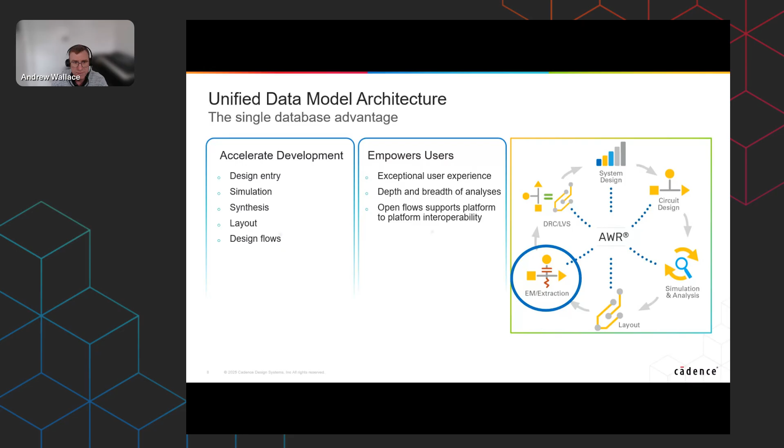We're going to be focusing quite a bit today on the EM extraction side of this flow to show you how we can take that layout automatically into the electromagnetic tool.

Now, I mentioned the AWR design platform. This includes AXIEM, that's a planar electromagnetic tool, Analyst, a 3D FEM, finite element method solver, and also the Visual Systems Simulator. That's a sample time domain systems block diagram tool that sits all inside the same platform.

Since the acquisition by Cadence, we have integrated their 3D EM tool. That's a product called Clarity, and their thermal tool, a 3D FEM solver once again called Celsius. And they excel at FEM simulation because they're able to distribute the mesh generation of the problem as well as the solving. So they will address very large board structures, very large electrical or mechanical structures in the EM or thermal worlds.

The beauty of these tools sitting side by side is that we can design from the system budget analysis, perhaps designing a communications link. We can drop into the circuit level design in the center of the screen here, and we can design the physical board with the actual vendor library component parts and the layout.

We can drop back into the system world to look at test benches and excite with real modulation signals, for example, radar or 5G. And then finally, we can drop into the EM world, that's the focus of this webinar today, to look at analysis perhaps of cross-coupling that was unexpected, maybe of antennas and radiation patterns in the 3D or the planar 2D EM world.

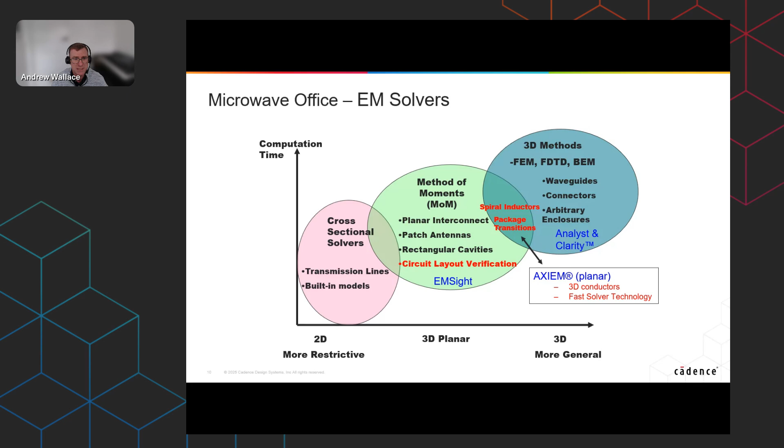Today's topics will talk about EM extraction from the circuit design, which can go into planar electromagnetic tools like EMsight and AXIEM. It can also go into 3D EM tools like Analyst and Clarity if it's a 3D issue, or even into thermal tools. Cadence has a tool called Celsius, a thermal 3D FEM solver, and we can export the layout generated by the schematic diagram into the thermal engine. I have a slide on that later on.

Specifically for AXIEM, the 3D planar tool, this is method of moments. It's open boundary, so we solve without metal walls around the element. That's great for antennas and antenna radiation patterns. On the top left corner of this picture, you can see a beamforming antenna radiation pattern generated from the software, and in the center, a fancy Sierpinski type antenna. All possible because they're planar and flat in nature.

PCBs by definition are planar and flat in nature, so that's the best solver to use for that approach. It is an off-grid solver, so we mesh the problems sent to the EM tool, and it's fully integrated into the circuit level simulator Microwave Office. We can do optimization, annotate and view the fields and currents, and do parametric sweeps and studies.

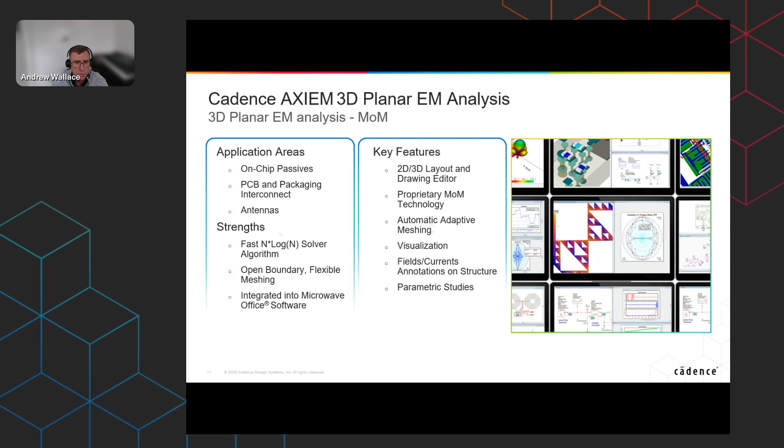If the issue is a 3D problem, I've mentioned Analyst and Clarity. They're both accessible from exactly the same flow. These really look at on and off chip passives, any 3D structures like a connector to board transition, perhaps a waveguide structure, bond wires inside the package, as you'll see in a moment on the next slide. Again, this is integrated into the Microwave Office tool.

We even have parameterized 3D elements that you can use and drop into the schematic design, along with some vendor encrypted components like connectors inside Clarity that come with a complete and accurate design as a 3D file that we use from the vendor manufacturers. Again, parametric studies, post-processing, and the ability to run over compute farms mean that's a very fast 3D electromagnetic tool.

Finally, the same extract flow I'm about to show you would work into the thermal world as well. We can take the design from the schematics entry - that design is 2D and 3D because of the single database - and copy that across into a thermal tool. I'll show you a similar design working inside the software in one of my examples. In this case, we have 3D bond wires and gallium arsenide transistor chips here, and you can see that they all heat with the RF power.

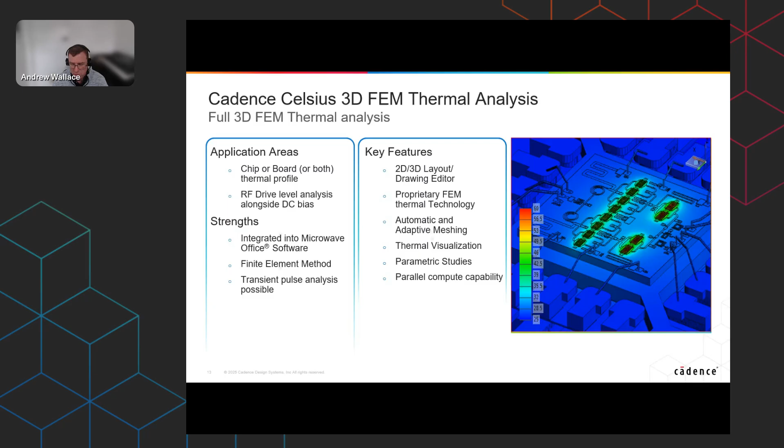The flow into the thermal tool is identical to that from the planar and 3D electromagnetic software. So let's look then inside the software at the actual extraction flow I've mentioned and how it works.

In the presentation that we'll share with you, I'll leave these slides behind, but I'm an ex-engineer and I love to demonstrate the software. So what I'm going to do is hopefully open up the design. You should be able to see the screen just now, and I'll check with my colleagues on the chat with me that the screen has changed.

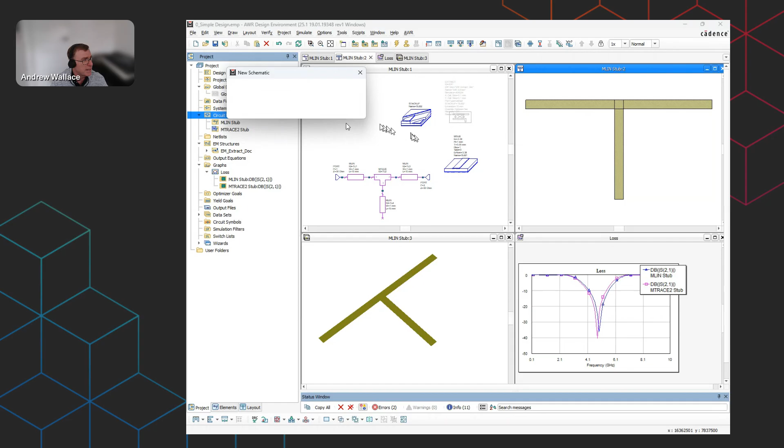Here we have Microwave Office, a circuit level simulator that we have just here, and it's very easy to drive. If I right click here on a new schematic diagram, we can generate a new schematic diagram, and from the elements tree we start to populate that with microstrip strip-line models. As we do so, these models aren't just electrical devices.

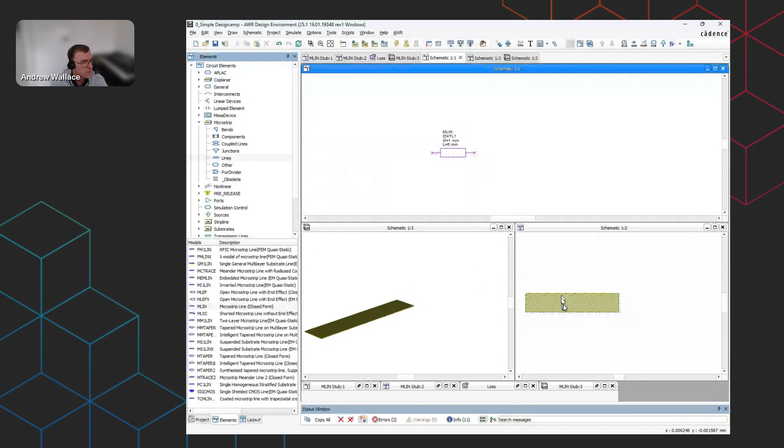Let's lose these for a moment in the background, but they have 2D and 3D layout associated with them. So the moment I look at the 2D and 3D image of this single object, you can see that it sits there at the correct size. If we change the schematic data, we update the layout. And if we come into the layout and double click and update the length and width of the line, you see immediately that the electrical schematic values are updating.

It's not synchronization. There's no layout versus schematic checking needed here. It is one C++ object that has views electrically in the 2D view and in the 3D view. So it's very, very easy to drag and drop those down.

If I do that and start to build up a stub circuit, just as you saw a moment ago, I'm dragging in a microstrip tee, an output transmission line, and a stub. You'll see just here that we have then effectively a 2D and 3D layout for this design.

That is giving us the ability to consider the layout as part of the electrical simulation. And when we generate a graph just here, let's turn off this one for a moment. We simulate and run that simulation and look at the results from the electrical world. Now we have a wonderful tool inside Microwave Office where you can add any of the parameter values to a tuning scroll bar.

You pick up the screwdriver, you pick up the width and the length of this item, and you'll see that those parameters are added. As I move the length and reduce that down, you should see the simulation results update.

If I were to grab the actual item, you'll see that when we let go of the slide bar, the schematic values update too. So that's real-time simulation running, as you can see on the video just there, giving us the answers. I'm just going to restore that to 10 millimeters as that's the basis now of our next approach.

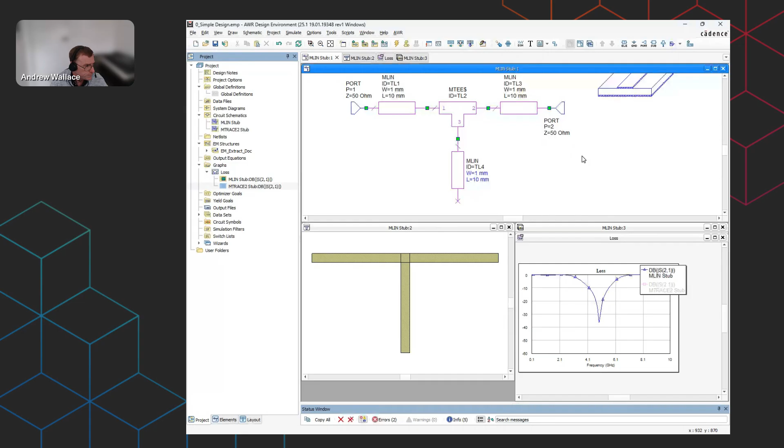Taking this design, what we need to do is send it out to the electromagnetic tool. And it's very simple to do so. We have the substrate definition here for the microstrip lines, but I'm going to drop into the scripts menu and use a script to generate the stack up that goes with this.

When we do so, you can see that we end up with a stack up that copies the microstrip substrate, but adds perhaps air and a board material above for the electromagnetic world, and also this extract block. That extract block allows us to go round the electrical items, select those electrical items, right click into their properties.

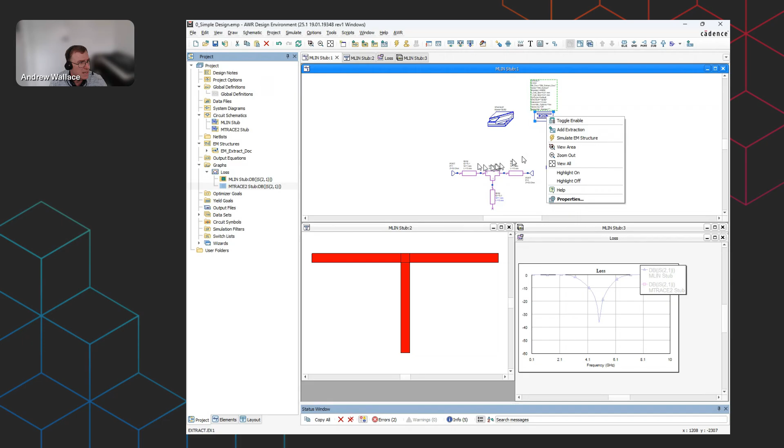If we enable that extraction tick box, then we end up immediately with the items being sent to the electromagnetic engine. So I've done that just here, and when we hit simulate, off goes the software. It copies the schematic diagram into the EM world.

It goes away and runs the electromagnetic simulation, and comes back with the results from a planar method of moments, from exactly that same design. That's something that will give us some answers, plotting the trace on the graph right over the top of what we had previously.

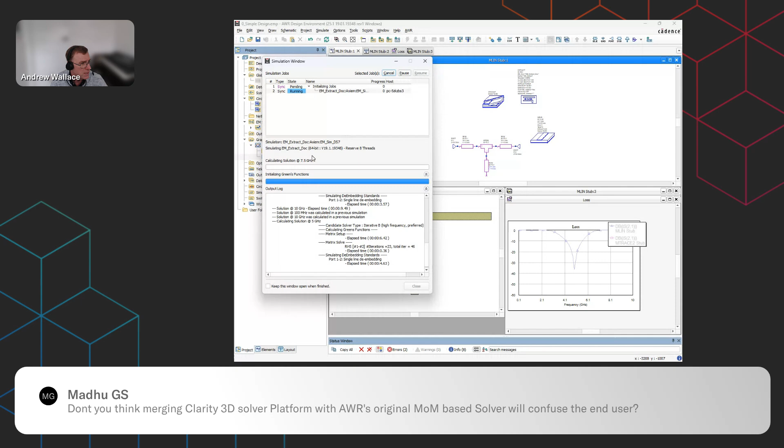Now, although this computer is actually a 10-core machine with dual threads, it could run 20 cores or virtual cores. I'm running just on 8 threads. We're doing adaptive frequency sweep. Just here, you can see that we've got various frequency points running, and that will give us some answers across the frequency band and plot our new trace.

So the actual method to take this schematic design across to the electromagnetic world is very straightforward. We are drawing the schematic diagram. We use a script to generate the stack up and the extract block, and then we take the elements and link them via the extract block into the EM world.

When we hit simulate, the software will go away and simulate that now in a method of moments tool, having meshed the design. Going to cancel that for a moment. I've got many more frequency points than I need. I don't need the answers to that just now.

So with the block off, we end up with the electrical simulation. And just in here now, I've got another design. That second design looks identical, but it has got the stack up and extract block enabled.

And when we turn on the trace from this simulation, you can see that when we run through the EM tool, we actually end up with, in this case, the right frequency points, a slightly different response. Now that's because we're looking at the radiation from the end of the stub.

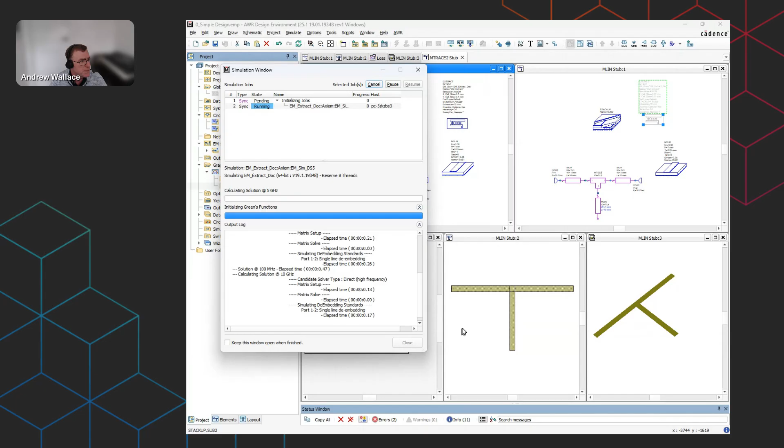And in terms of the stack up of material, we might be looking at the layer of air and perhaps a lid above the box. So you can see immediately if we were to lower the lid down and make that much closer to our track, re-hit simulate, then our transmission line resonant frequency is likely to change because of the position of that lid.

And you'll see that our pink trace now has jumped from the left of the original to the right. That's an effect of the lid. Let's go back and make that much further away once again.

Now, when we start to shrink designs, we've got some clever items we can use. Instead of a standard transmission line, what I've got here is an M-trace element. That M-trace element in the layout allows me to route the item back round on itself, keeping the length fixed to 10 millimeters, but bending it back on itself.

It should still be the same transmission line performance, but of course now there is coupling in these traces that the electrical design does not take into account.

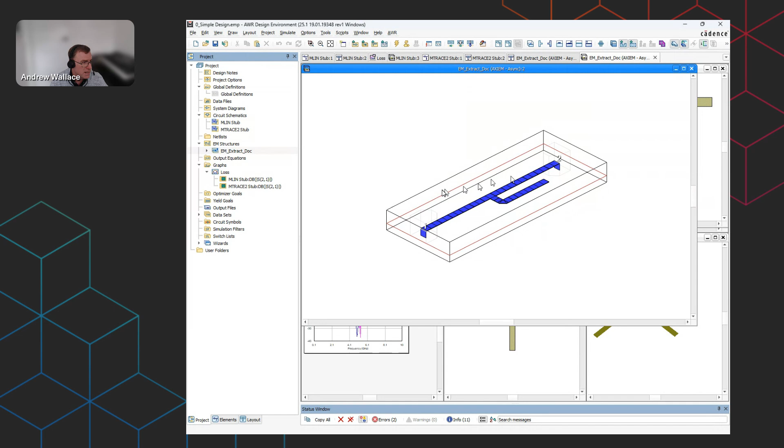When we hit simulate, the method is that we copy that schematic into the electromagnetic world. You see it's just updated the copy. We put it onto the board material in 3D space, mesh it, and that mesh was generated in the background and solved with the 3D planar method of moments tool. The S-parameter files are brought back, and we end up with the results in the schematic simulation traces.

So this idea of bending the transmission line, folding it back on itself, gives us quite different results in terms of frequency points. If I mark them, our original was at 5 or 4.9 gigahertz. The fact that we're folding it back is now 400 megahertz higher, about 10% difference, purely because of that coupling from the trace line.

So it's important to use this flow. To repeat once again, I'm taking the electrical schematic design that generates the layout automatically. With the extract block, the extraction copies the design into the EM world and does an EM simulation. Just to prove it's copying dynamically, let's double click and change this line just here.

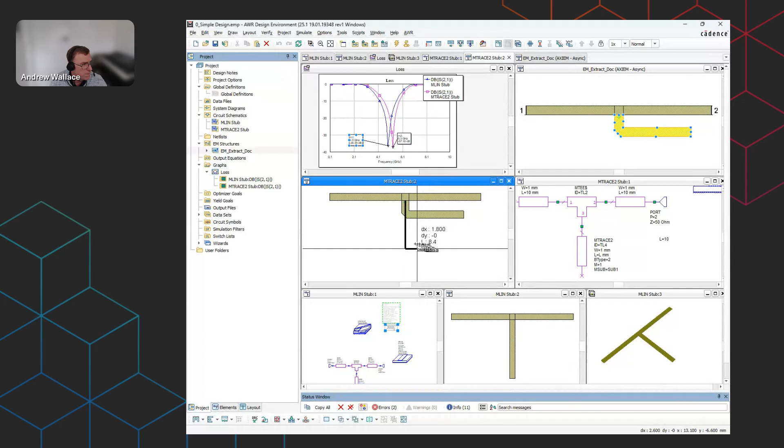That folding back, when we hit simulate, is copied into the electromagnetic tool. The mesh is generated, and I expect this will change in frequency once again from 5.3 gigahertz, changed in depth of notch there because of the way the coupling is taking place. So this extraction flow is a very straightforward method to use.

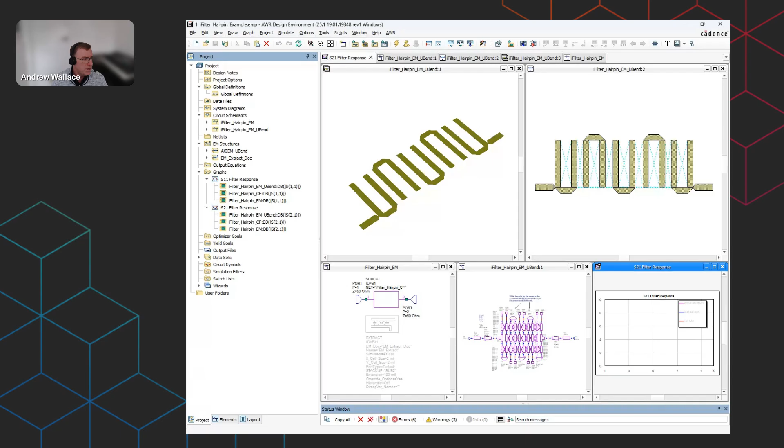And if we drop into the software just now, let's find that one. Two moments, this one here. You can see that schematic diagram is what's responsible for generating the layout.

If I come in here and turn off the schematic elements, it is the schematic diagram that is generating the electrical layout, in 2 and 3D views. And when we simulate in the linear simulator, we have quite a fast simulation result.

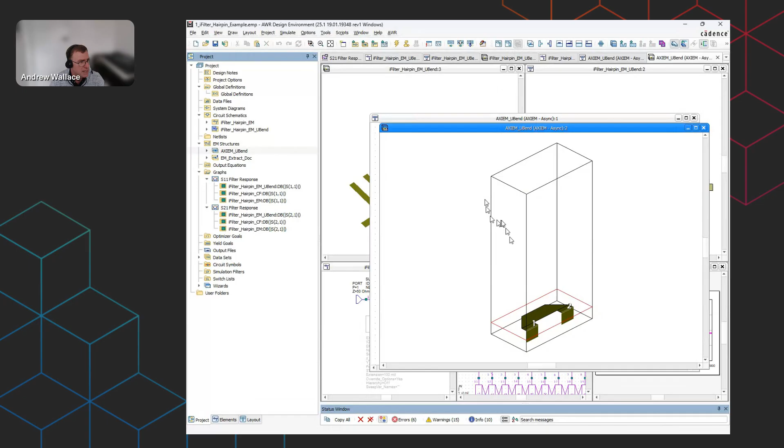Now, in this case, we've actually done one other step in between. This is a bend in the structure, this section here. We don't have a very good electrical model for that, so we have an EM design for that bend that has been meshed and simulated in the EM tool in its own right. So that is a standalone bend that we've included.

Now that bend means there is signal coupled back against itself. You can see in the graph quite a difference between the original schematic diagram, the electrical models, versus the design that has the electromagnetic results for the bend. This is quite a big shift in corner frequency, going from 5.5 gigahertz all the way up to 5.6 gigahertz, so 100 megahertz difference perhaps in that corner frequency.

Now that's quite a quick and dirty way of looking at the design just with the bend. What I want to do is extract the whole filter. So in this case, our extract block is pointing to the AXIEM tool. I've mentioned earlier we could get to 3D EM or EM thermal approaches, so in this case we're going out to AXIEM.

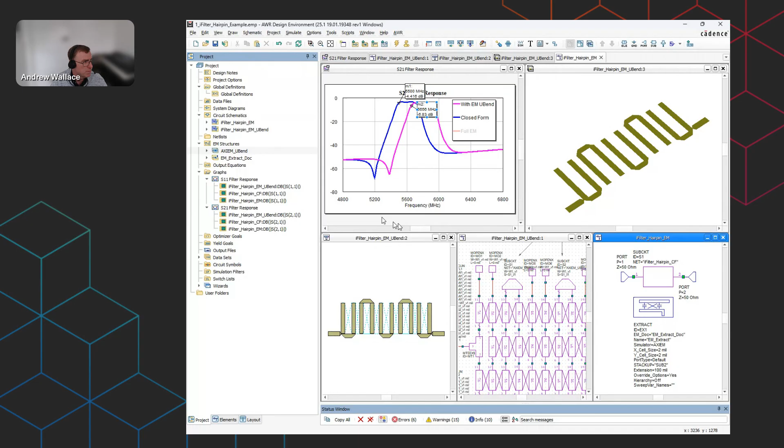What it will do is copy that design into the electromagnetic world, like we have here. It will take that into the substrate definition, mesh that, and solve it in the electromagnetic world.

Once again, let's hit go and look at the results. So once again, even with a small difference from the EM bend versus the electrical bend, we now have a complete filter that's solved and simulated in the electromagnetic world, with a response that I would trust.

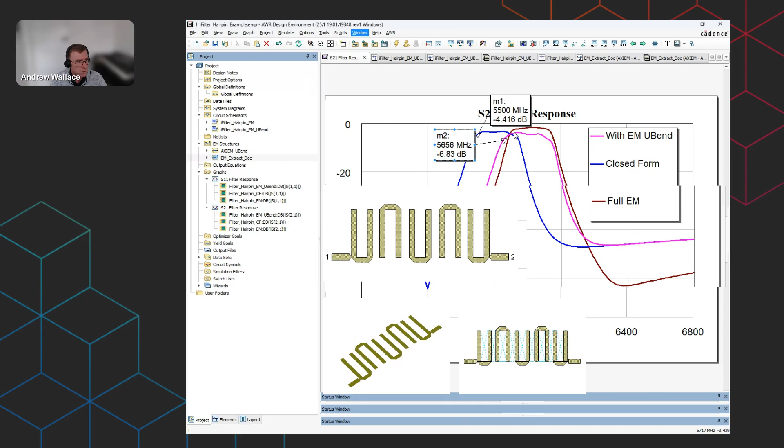And that's because we're folding things in nice and tight, and because coupling is going on between the circuit elements that perhaps we're not simulating. So it's critical to use this planar electromagnetic tool within the design flow.

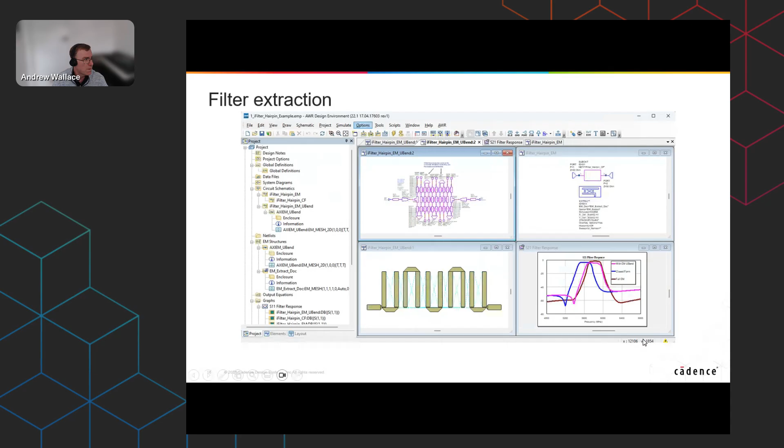Not only can we send out circuit diagram elements, but we can also send out other parts of the board design too. This is critical, I think, when you start to include things like ground plane or via holes, enclosure cavities and walls. This next example is one that we ship with the software, in fact, they all are.

Let me open this full screen for you to view as we're demonstrating. After the webinar, you can get access to these examples under File, Open, Example. If you type in LNA, you'll find a 5 GHz low noise amplifier that ships with the software. That's the example I'm showing you here today.

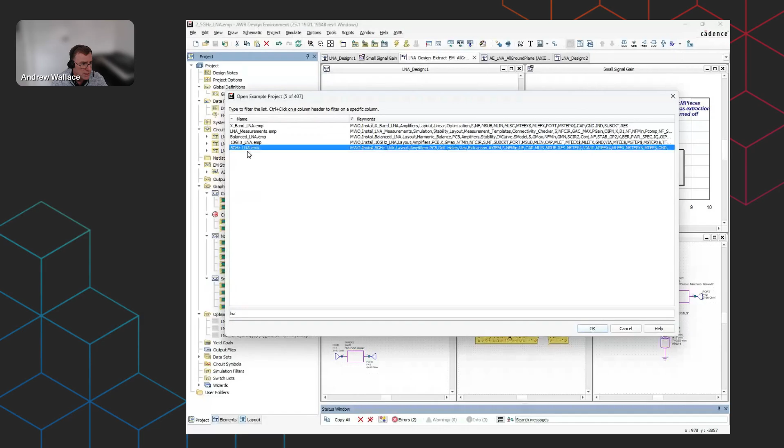Every example we ship comes with design notes, and at the top of the project tree we explain what we're trying to show. This one in particular talks about AXIEM extraction and how we do that.

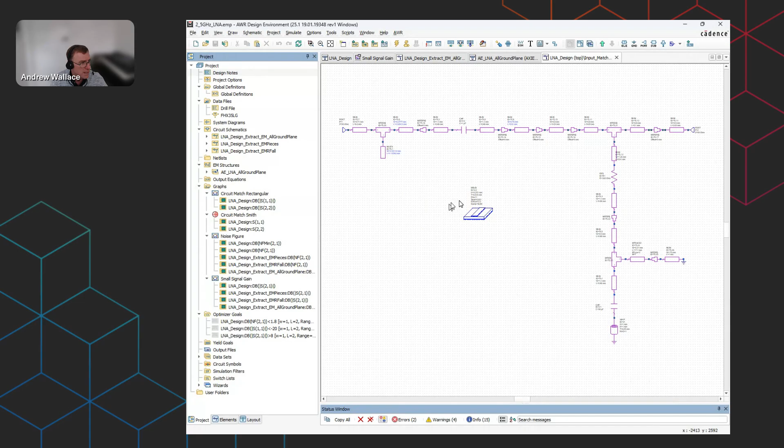So I'm going to run this in two ways. The first simulation runs this design. We have a low noise amplifier with signal gain of about 10 dBs, designed to be centered at 5 GHz. That's the circuit electrical models, which in this case come from an S-parameter data file, but also the matching circuits designed around that. It's a very fast linear simulation, so you'd expect quick results.

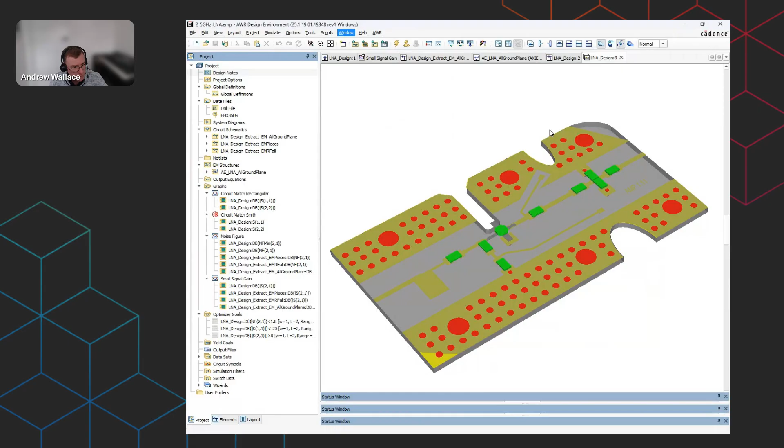But as an ex-engineer, I've got suspicions that although this center line is designed by the schematic tool, the extra ground plane and board elements, which we can see in 3D here, will have an effect on the design. So what I want to do is take my design, copy it as a hierarchical subcircuit, and use one extraction block. That extraction block extracts all of the metalwork.

So here, anything in red will be taken to the electromagnetic tool automatically. The ports are assigned, the port de-embedding is done automatically. Any coupling or radiation that goes on is picked up in the electromagnetic tool. The circuit elements are simulated back in the circuit level design schematic, so we do include the electrical connections as well. It will still be an amplifier with gain, with the attenuation and matching you have here, but with the electromagnetic results added.

When we switch on that extract block and resimulate, we go away and simulate in a 3D electromagnetic world. It's the 3D planar. Here's the copy of the design, and there's the structure in the 3D microstrip world and the mesh that was used. We get a very fast simulation result from that design, and that was pre-simulated. So during this call, if I force resimulation, you'll see the simulation time it takes to run this problem.

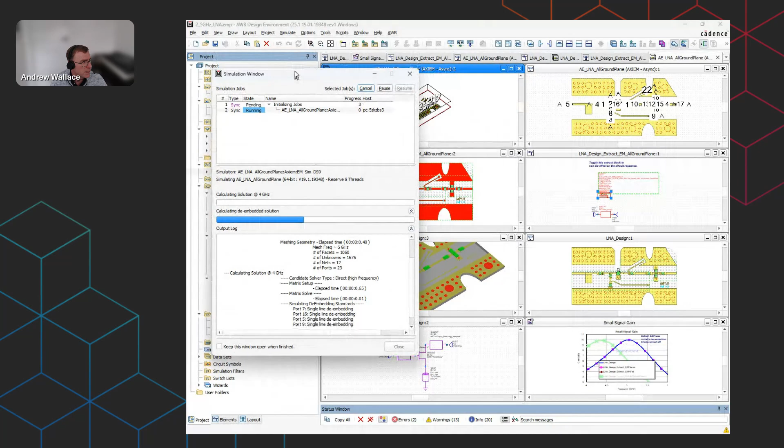Sorry, the simulation window was on another screen. It is a very, very fast process. When I hit go, you can see that within a few seconds we have the electromagnetic results now. I don't have time to go make coffee, I don't have time to take a lunch break. Electromagnetic engines are being used in the design flow, and that's critical.

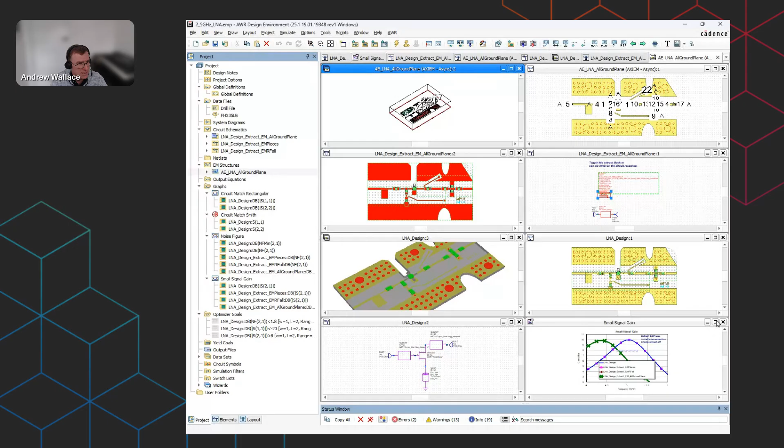We're now picking up coupling, we're picking up radiation losses, and more importantly to me as a design engineer, what I thought I'd made as a 5 GHz amplifier has now shifted in frequency. Again, it's about 10% out. So that shows the importance of using electromagnetic tools in the design flow.

Those have been simple designs. They've been on a PCB stack of material with one layer, FR4 microstrip or Rogers material, perhaps for microwave type design. But this extraction flow works in an identical way for multi-layer boards, as you'd expect.

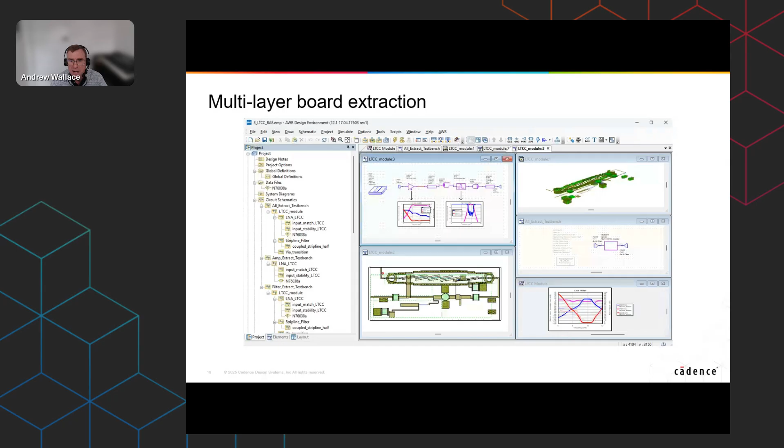This particular design, I'll leave the slide here, but I'll jump into the software to show you it working. It's a multi-layer, low temperature co-fired ceramic design. If we look at the 3D picture, hopefully you can clearly see there, it's about 6 or 7 layers. In fact, what we have is on the top surface a very similar low noise amplifier with matching components, but a buried filter. That filter is buried inside the board stack.

Now that's a strip line type filter inside the layers of board material. But I've been quite a bad design engineer.

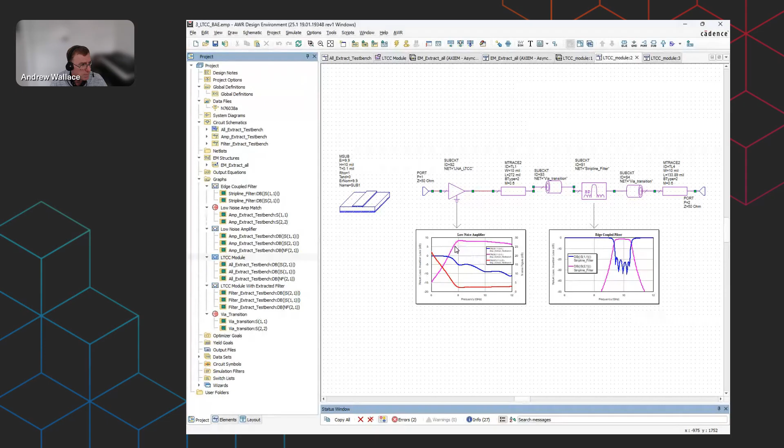I've put some of my matching network overlapping that filter underneath, some distance inside the board stack. In the electrical world, when we design this circuitry, we design the filter and the amplifier as completely isolated elements, and we look at the responses of the two individual items. We have the performance of the low noise amplifier, the performance of the filter, and when we bolt them back to back, we get what we expect to be the final design. Looks nice and clean, looks well behaved, and we manufacture that and find there's actually quite a difference in the manufacturing measured results compared to simulation.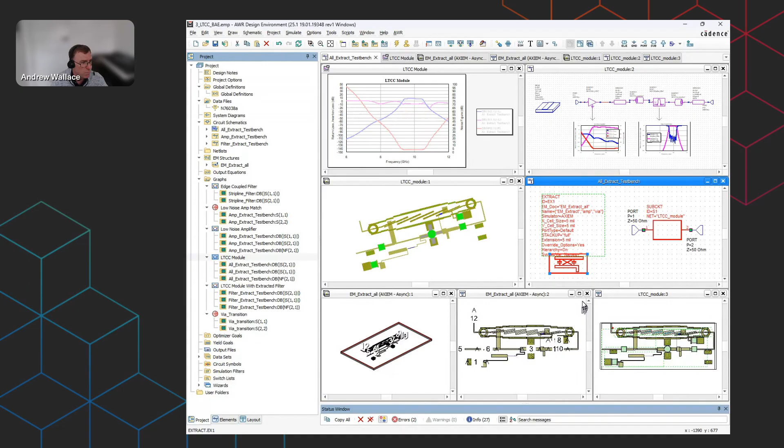The S-parameter results are generated from this structure, and once again, as an engineer, I'll simulate that. We get some real results. Now, it's very nice to compare the electromagnetic, if I freeze that graph, with the non-electromagnetic.

So I simply turn off the extract block. You can see, rather worryingly, we get some very strange visual artifacts because of that filter stub overlap with the bandpass filter buried inside. Now it's quite close to real life measurements, and as you can see, our expected filter bandwidth is actually much less than I would have hoped from the design.

So this design flow using the electromagnetic engine is really important, and it does need to be predicted. We can design around it, and perhaps in this case I could flip those stub lines and put them on the other side, not overlapping the buried bandpass filter, if there was space to do so.

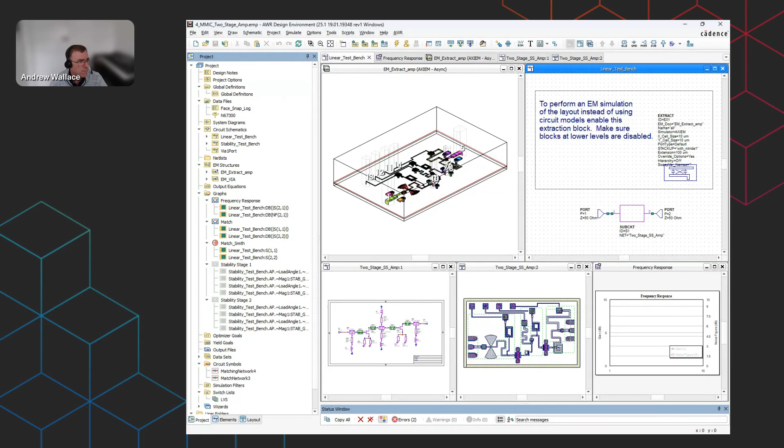That was a simple PCB, but what if you were designing gallium arsenide or gallium nitride, silicon germanium chips? To the Microwave Office tool, that's simply another process design kit. By process design kit, I mean that we've started the software with design layers, units, and coloring appropriate to a chip design tool. So if I jump into that example, here you can see that we've got a circuit level design. There's a gallium arsenide chip.

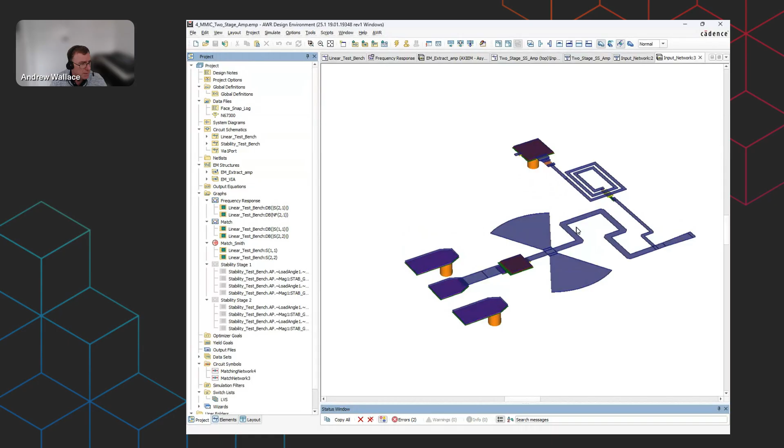So here's my transistor, here's my matching network, and in this case, the matching network might be matching... in fact that was the device. Sorry, let's go down across here. The input network might be a sub-circuit that is now built with spiral inductors, via holes, and printed items that are on the gallium arsenide chip. This has the layout generated by the schematic diagram that looks like that - radial stub filtering on the input and multi-layer gallium arsenide, gallium nitride type design techniques.

We can export this as GDS2 to make the design. And once again, when we simulate in the schematic diagram, we have a very fast linear simulation, non-linear if we have non-linear devices, and you see the response here of the non-linear simulation in this case using the active devices.

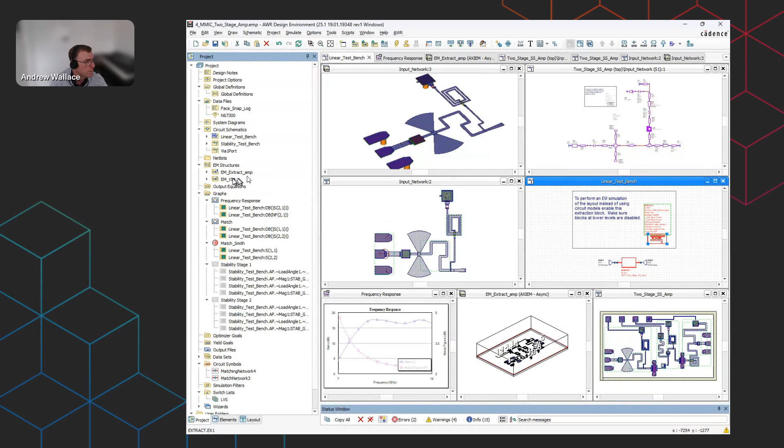Now in this case, once again, at a top level of hierarchy, I'm going to extract the whole design. To give you some idea, if we look at that extraction block, it's extracting the whole amplifier. This is all the metalwork minus the active devices. The transistors have ports. We're going to send that to the method of moment solver.

So that will go away and mesh this off grid. You can see the triangles where we need them and the rectangles where we can get away with them. In fact, this is quite a coarse grid - I'd not recommend this, this is actually just for speed in the demonstration today, but I'd recommend at least 3 cells across the lines. But even so, we get a good result from the electromagnetic engine.

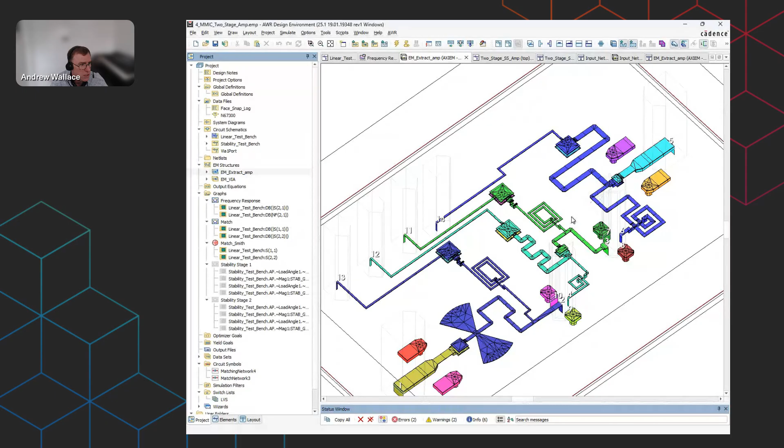Why is that important? We have a lot of the biasing chokes linking very close to the RF transmission lines. We have the interstage biasing close to the first and the output stage coupling, and they will all interact. The electrical diagram doesn't pick any of that up, the EM tool does. And when we hit simulate, once again, that was a pre-stored answer.

Let me do this and force it to run fresh. I pre-simulated this today before the webinar. When I hit go, we see this run through the electromagnetic engine, and the time it takes to run as a problem in the method of moments tool. I'm only using 8 cores. I could make this twice as fast if I used all of them.

We're jumping around with what we call AFS, adaptive frequency sweep. That technique looks at some of the front end frequency points, some at the back end, tests some in the middle, and validates equation fits. If we're happy with that equation fit and validated data, we estimate and predict the electromagnetic results from equations. We can very simply switch off AFS, the adaptive frequency sweep, but it's a nice way to have a quick look at the simulation results and what's going on.

We don't really have time to go away for coffee. This should all be part of the design flow. We've now got quite a complex design there with metallization of the input and the output. We're simulating at multiple frequency points, and you can see that within just a few moments, as a live simulation on this webinar, I'm not cheating, nothing's pre-simulated. I'm not using a server farm or the cloud. It's being run on my compute machine.

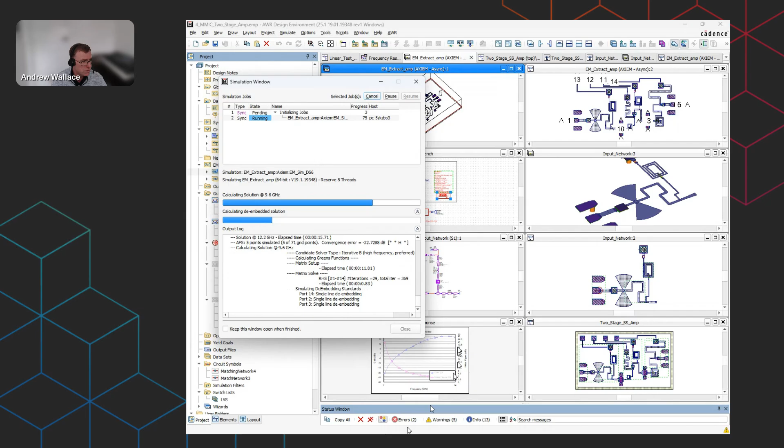We can see some very quick answers to the design popping through on the simulation tool. That will predict all of that interstage coupling. In this case, I don't know if you saw down on the bottom left graph, we lost a great deal of our amplifier bandwidth. There it is, it's finished. So that's the simulation time for this rather complex, complete metallization design. This is the result that we get.

If I freeze that on the graph and go back to our circuit level models, very, very fast results, of course, from circuit, but very inaccurate in terms of bandwidth and gain that we're predicting. So I do stress once again how critical and important it is to use this extraction approach to get designs right first time. More so when you're starting to shrink designs down as elements and structures, be it drones, be it remote vehicles, be it any type of printed circuit board where you're trying to reduce surface area or volume of the PCB or the electrical design.

So I hope that's made some sense with the EM extraction flow. Let's drop back into the slides for a moment. I now want to move on to this concept with exactly the same flow technique, but moving out to the 3D electromagnetic engine.

And today in our Cadence world, we have 2 FEM engines, Analyst and Clarity. In fact, you can run them both side by side in the platform if you have license and wish to compare results. They give identical results in the simulation world within 0.01 to 0.05 of a dB. So very accurate results from the 2 different approaches, but the flow is identical.

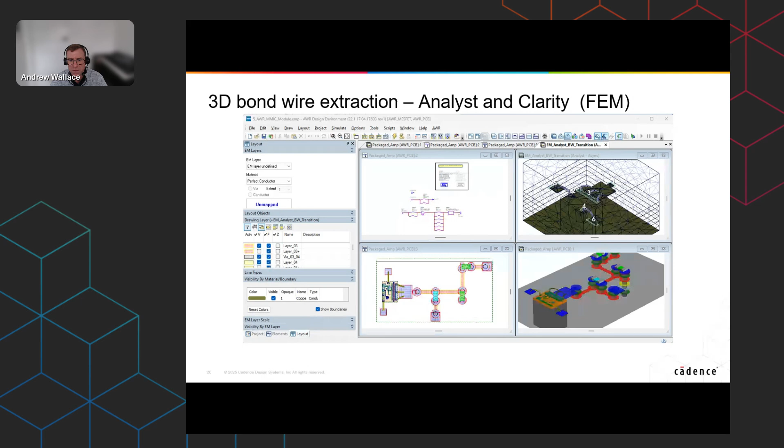So once again, I'd like to show you this rather than talk to a slide. Here's our design. Remember, the electrical design elements are generated in the schematic layout. All I drew manually here was the heatsink block tower that sits under my chip. We have 2 technologies here: printed circuit board surface mount components for the output matching filter, and a MESFET design, all designed electrically in the schematic diagram.

Around that, connecting the 2, we have bond wire elements. These are very simple electrical models, although quite advanced, these bond wires, and they have JEDEC standards behind them in either 3 or 4 bond wire segments. When we drop them down electrically, we place them in the 2D layout view. Now, the issue is that when we simulate with the linear and non-linear tools, let's drag across, there's my harmonic balance engine running, we have a very clean design.

That's clean because in this case, the electrical bond wires are completely isolated electrically in the schematic diagram. In this case, that's a 3D problem. What I'm going to do is suggest we use exactly the same extraction flow. That extraction block is now linked to just the bond wires. You'll see down here the segments we're taking, just the bond wires, not the flat MESFET or the elements. But this time, the difference is I've selected Analyst, the 3D FEM solver. I could send this to AXIEM, but it's a 3D problem, because we have a bond wire going through air across the height of dielectric substrate that could also couple.

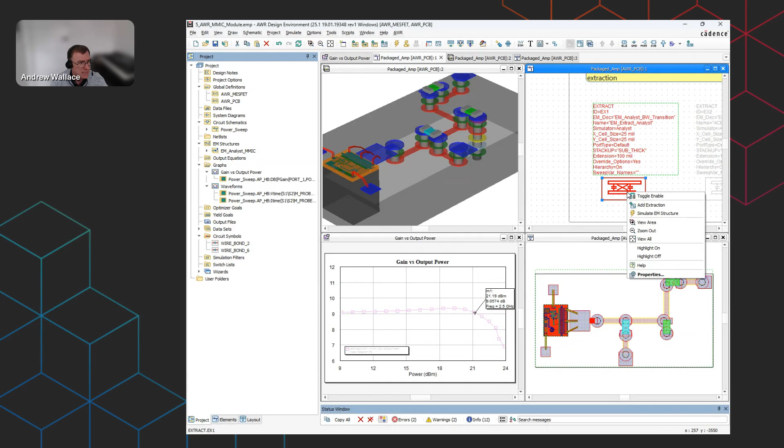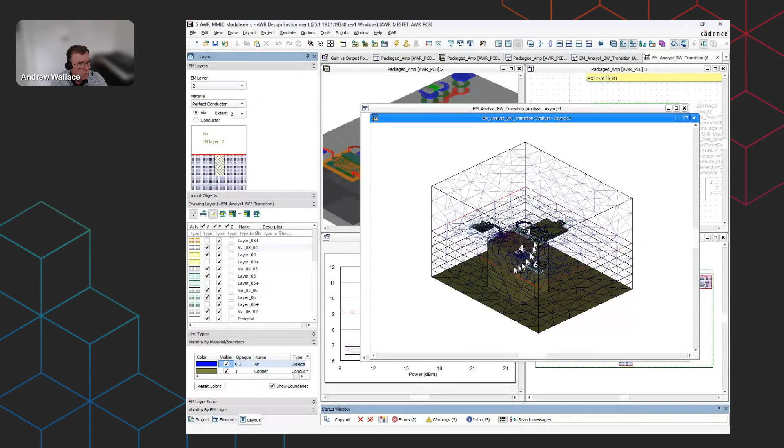Once again, what the flow does is it takes the design that I've marked and generates an extraction copying those elements, puts on the ports automatically, but this time we're in a 3D world. When we generate the mesh, that mesh is generated across both the metallization and the dielectric, and if I turn it on, a 3D engine will also solve all of the air volume above the design. So now we've got quite a complex tetrahedra mesh to solve—not flat triangles and squares like AXIEM, but 3D tetrahedra.

And once again, as an ex-engineer, I don't like cheating. Let's hit simulate—that's already been done, so let's force it to run from scratch. Even at that level of intensity, there's quite a few unknowns here. We're going to go away and mesh this design and solve it. We'll set that going, and we have something like 10,000 unknown counts in terms of the mesh, just under 10,000.

So that gives you an idea of the complexity of the problem for this part of the design. I'll hit simulate and start that running. And what you'll see on the graph is the previous results.

I'll show you again live during the webinar how long it takes. But the results show a marked difference between the amplifier and matching network gain when we take it into the electromagnetic world to check any coupling between those bond wires. Now, the approach in this instance, ladies and gentlemen, is that we go round a loop.

This is adaptive mesh refinement, like any other 3D electromagnetic tool. We do an initial mesh, solve the problem, and have an answer, then refine the mesh once again and solve a second time. We compare those two mesh answers and see whether there's any difference. We're trying to get this difference down to below minus 20 dBs or thereabouts between two simulation runs. This is now on the 6th iteration of solving that problem.

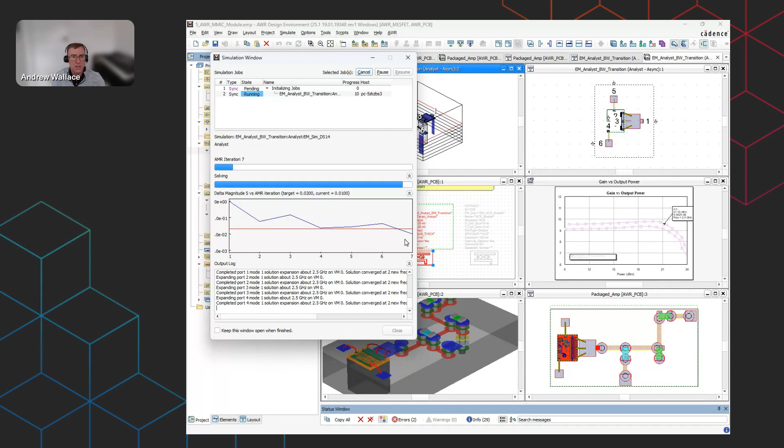And within just a few minutes of me talking there, we've dropped below our error tolerance. That's a pass as far as the software is concerned. We do a final mesh, refine it once again, and rerun that for one final check. And if that also drops below the error tolerance, then we agree that the results are valid, and we plot that trace as an accurate, dynamic, and up-to-date result for the 3D problem in this instance. So that's a 3D FEM solve in real time, run on my machine.

There we go, it's finished, and the results that come from that. And once again, if we freeze that trace, we could switch off the extract block and drop back into the circuit level simulation, and you'll see the results from that immediately. So there is a marked difference in terms of coupling.

In this case, we actually appear to get a little bit more power from the device, or perhaps more gain, maybe because we're taking into account coupling away from the ground plane, or a lack of loss that the electrical models were predicting, whereas in fact in the electromagnetic world we have the absolute correct material. So it's critical to do that in the 3D world as well.

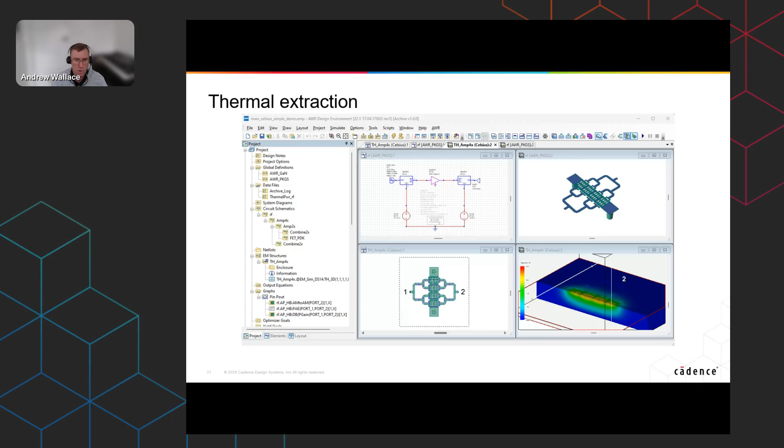Let's carry on with our slides. I mentioned that this is possible into the thermal engine. So far we've done an extraction into the electromagnetic world in 2D for AXIEM and 3D for FEM. Let's look quite quickly at a thermal extraction.

Now it's done in exactly the same way in the software. We have a circuit diagram, we have the layout that's generated for that. In this case, it's 4 active devices with their splitters. The only difference in this design is that here, I've asked it to go and extract that design.

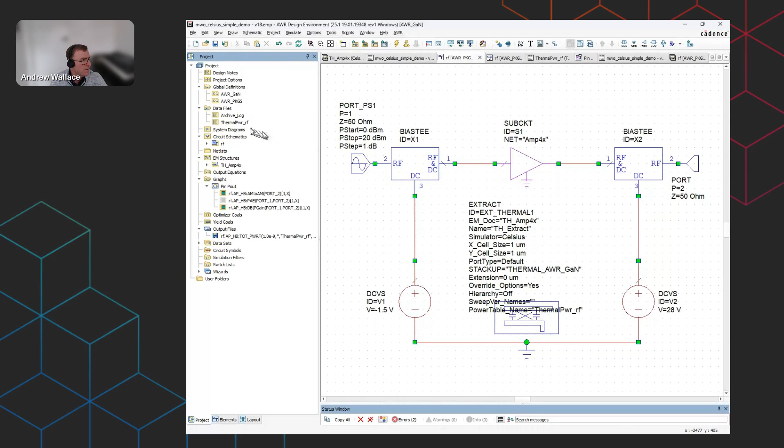If I turn this on, you can see it's picking up the amplifier chip, all of the metallization. That's what it's going to send in this case, not to the electromagnetic tool, but to the thermal tool, because I chose Celsius in the pull-down menu. Now, Celsius also needs the power table—that's something we calculate, and that power table tells us what the RF and DC power is in the tracks. And when we send it out to that tool, this does take 2 or 3 minutes.

We're running short on webinar time, so I'll just show you the simulation results. We end up sending back the thermal profile, a quantitative picture with the temperatures shown back in the tool.

We can slice through that design if we wish. Let's slice and look at how that temperature profile is across, in this case, a gallium arsenide, gallium nitride chip, the heat radiating from the FET fingers. Those at the external edges are a lot cooler because of the grounding via. So that thermal extraction flow is possible in the software suite too, at any level. It could be printed circuit boards.

That is it if you're using the electromagnetic engine from the schematic as a starting point. Let's spend a few moments on antenna analysis and looking at the electromagnetic tool standalone.

So again, I have the slides here. This is a built-in example in the software, and I prefer to show you it live in the tool rather than talk to a slide. Let me see if I can find the right design, this one here.

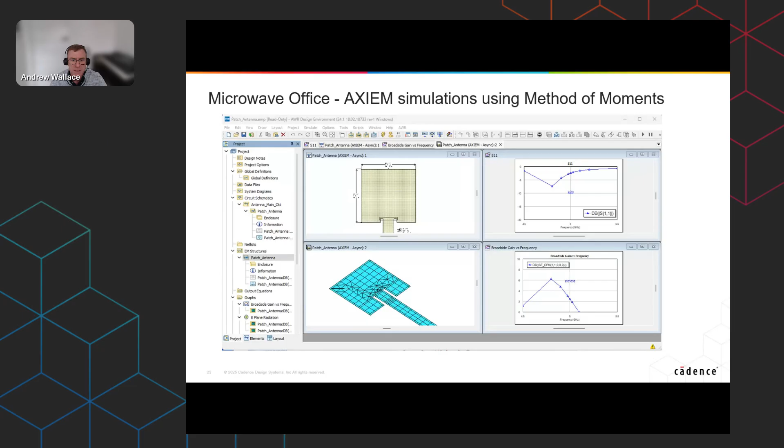So here's the software itself. It's a very easy design to put together. We literally, in the 2D world, draw in the layout on the copper layers some shapes. We draw multiple shapes that we union together by selecting them and putting them and unioning those together. And then we can draw some cutouts. So if I draw a shape here, copy and paste with Control-C, Control-V, pick up our shape and the two items I want to subtract, we can subtract those away.

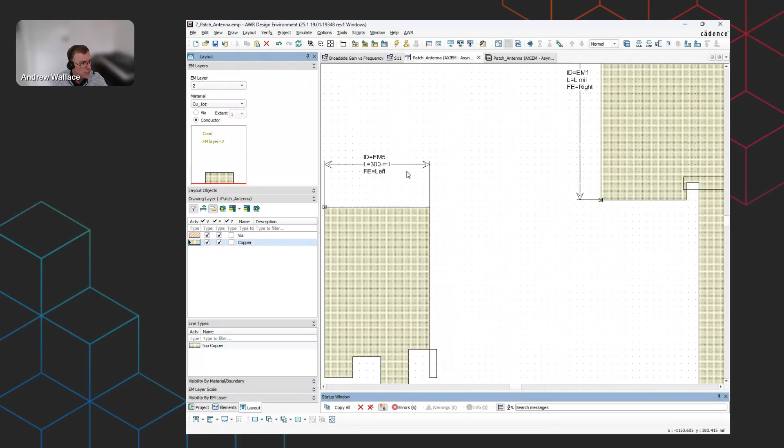So very quickly, I've drawn the structure you see on the right-hand side. I've added some shape modifiers under the Draw menu to modify the length of the edge. Once that's specified, we can easily change the size of the design. It needs to be sensible with my cutout, of course, but you can see those shape modifiers work very nicely.

I've taken those parameters for the length and width, and I've set them to be tunable, but more importantly, I've set them to optimize. So we have a 2D shape, we put on a port, and it has a 3D view, of course. What I've done is ask it to simulate in AXIEM, the method of moments tool.

But in this case, it's an antenna. So under the project tab, I right click and ask it to add annotation, specifically the 3D antenna picture, which you can see already added and generated here. Now this is a perfect microstrip design with a perfect ground plane on the bottom side, that's why you see nothing underneath.

But what I have is some 2D graphs on broadside gain versus frequency and the input match. I've drawn some optimization goals here. You simply right click on the optimization goal, pick the measurement, add the goal, and it appears on the screen. Once they're on the screen, you can even drag and drop and move them around physically and dynamically.

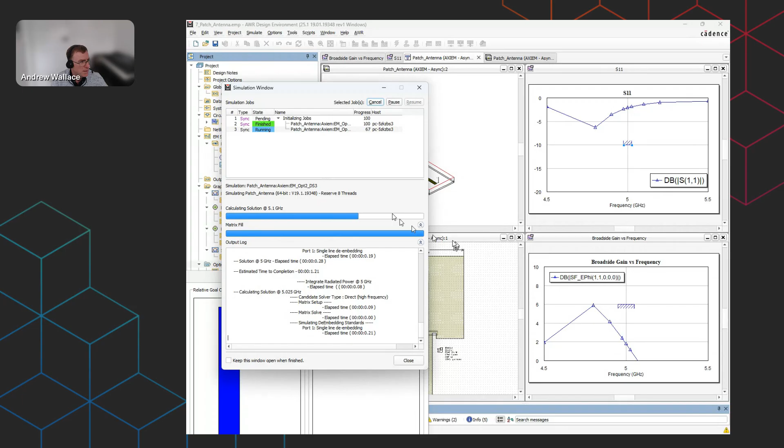Why have I done that? I want to optimize this antenna for 5 gigahertz operation. So with that graph and trace defined, and the structure already proposed, I can now run the optimizer. We have multiple optimization methods, but in this case we're on a grid, so I'm going to run the grid search. As we run the simulation, I hope you can see the antenna size changing automatically by the optimizer. Within just a few moments, we find a solution that meets those antenna design goals.

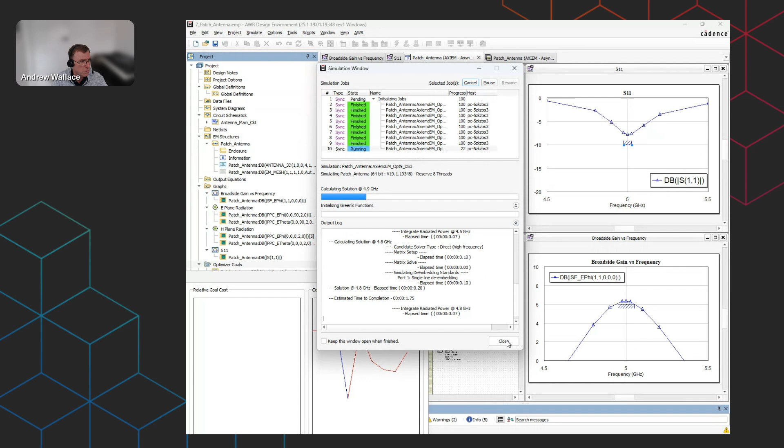Again, this is running real time on my computer, ladies and gentlemen. It's only running on 8 cores. We're not doing anything clever. I could make it much faster. That's real time simulation of multiple changes to multiple parameters in the optimization world.

Because we had stop at minimum error when I stopped this design, we end up simulating and showing you the final result. So that's an optimized patch. In this case, we've moved the frequency to 5 gigahertz. Now, finally, in this webinar, I promised to mention the idea of phased array antennas.

They could be based either on planar designs or on 3D designs. I mentioned the 3D tool.

So very quickly, here's a pyramid horn that's been designed. To give you an idea of simulation speed, I'll hit go. This is now 3D finite element solving, a pyramid horn that's been designed in the structure. We can import SAT files, IGES files, step files.

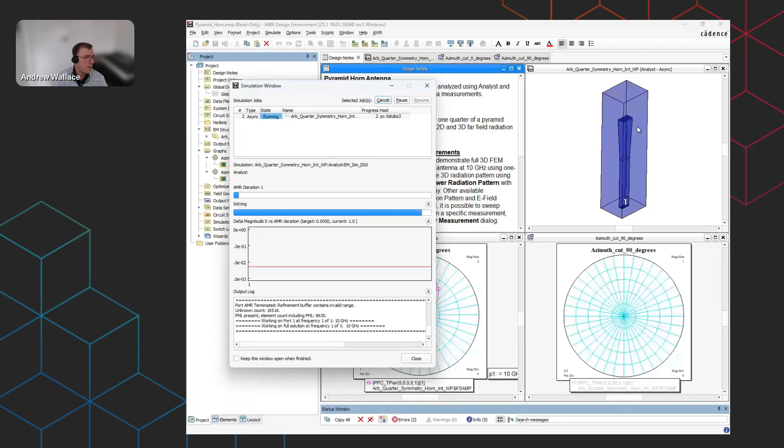This is running in Analyst. It would run identically in Clarity, but actually be even faster still. And we go around this adaptive mesh sweep. And when it's finished, in fact, it's done. That's the first iteration finished.

Now, I don't need, in this case, for the webinar to let that converge. It takes a few more minutes. We're running short on time today, but what you can see now is it's done 2 simulations of this design. We've annotated the 3D view, and we've got the cross-sectional cuts and solves for the structure on our graphs. They are grayed out because I stopped the simulation before

convergence had finished. But the design was done with an electric and magnetic boundary, i.e. some symmetry, and you can see our quarter waveguide horn design here, but the radiation pattern with absolute quantitative directivity and radiation emissions powers.

So finally on our slide deck, I mentioned that we could use the phased array wizard. This is built into the tool, and the idea is that we take a design, we can configure the phased array repetition of that design, and in the synthesis window look at the radiation pattern. We can play around with gain tapers or element failures.

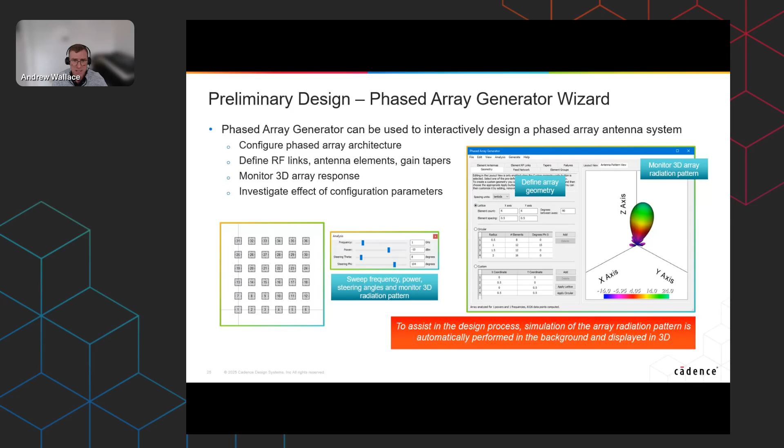We can look at the response in 3D in the synthesis tool. This phased array generator would then allow us to play around with configurations, topologies, perhaps tapers, mathematically affecting the signal that is sent to each patch. And finally, we export that into the analysis tool. This is a planar array patch, so this is ideal for AXIEM.

So to finish the presentation today, again, I'd like to drop into that as an electrical design. Here it is. What I did was I used a phased array wizard. It sits down under the wizard's branch. That phased array wizard or the generator allows us to propose a structure, I don't know, 4x2, 4x3.

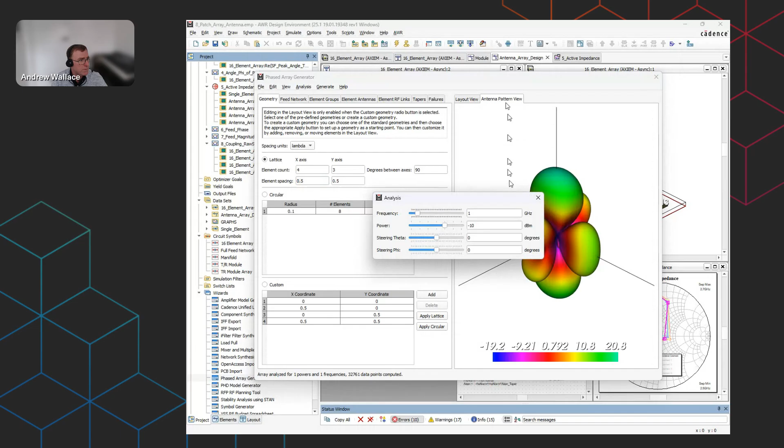And as we're doing that proposal, we can look at the antenna radiation pattern, steer the beam, but also look at applying mathematical tapers to see whether we can focus that energy on boresight. And in fact, in this case, I did a 4x4 array, and we can then simply go and generate the schematic layout that dumps it into Microwave Office as an AXIEM problem.

Once in Microwave Office, I've already done that in the background just here, it takes a few moments, we end up with a 4x4 array, the electrical ports all produced, and we can simulate that in the electromagnetic tool.

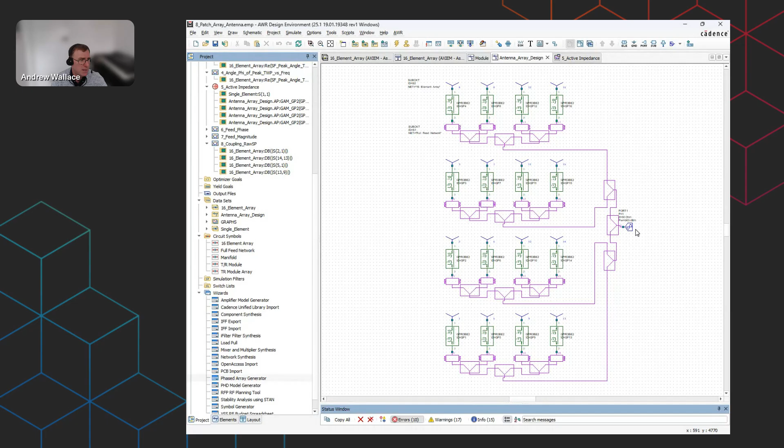But one clever thing here to add is that in the electromagnetic tool, we can excite it with a circuit level signal. Because Microwave Office is a circuit tool and an electromagnetic tool are one and the same piece of software, we have a real drive signal of 40 dBm going to each of these elements which affect the phase

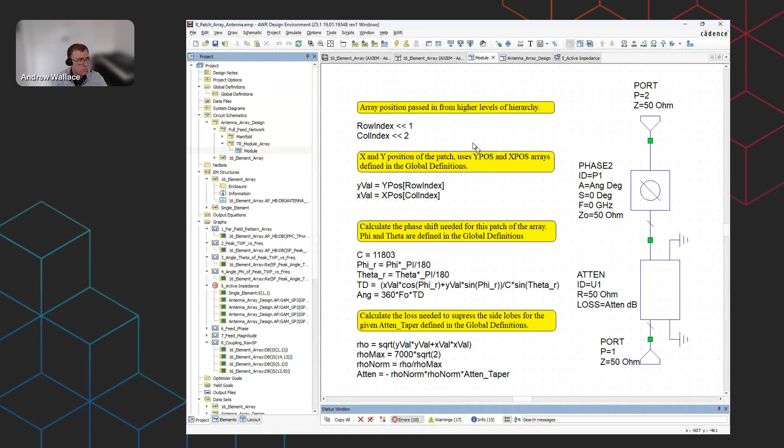and magnitude. In fact, each of these is a repetition of, if I come down inside the feed network, a phase control module and an attenuation module controlled by the row index, the column index. And we simulate that in the electromagnetic world, and in this case use that EM sub-circuit. You can see the 16 antennas here, I hope, moving around from the EM results in the electrical world.

So once again, rather than cheat, it's not pre-simulated. I'll hit simulate. You can see the speed of simulation in the webinar live for this type of level of integration. I'm running 8 cores.

And what I've done in this case is I've set up the tuner to hijack the phi and the theta calculations to allow us to investigate some of the beam steering, but also some of the side lobe generation in the tool. So just to reiterate, we use the phased array wizard generator, sitting down under the wizard's branch to

generate the array. It doesn't have to be rectangular like I have here. It could be circular. It could be an off-grid array. It doesn't have to be a patch. It could be whatever your underlying individual item is. And that could be quite a complicated design, perhaps on a PCB carrier.

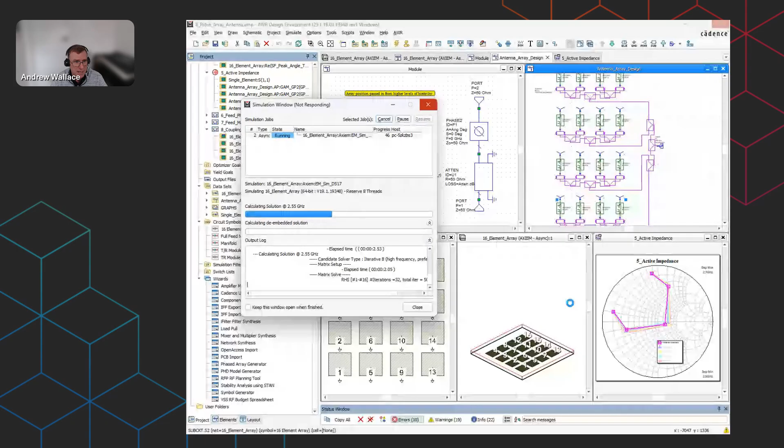We use that, and we excite it with a circuit level signal. That circuit level signal is going to back annotate some phased array patterns, and we're going to annotate those then into the 3D view, the planar 3D view, once the simulation's finished. Now we're going to let that just finish simulation. I'll come back to that in a moment, as I say, to show you the real-time simulation.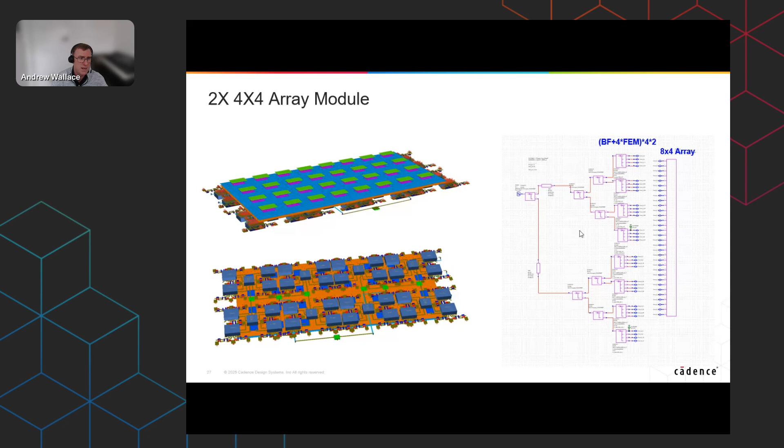As a final slide, I wanted to show you our phased array synthesis. This is the type of result you'll see in the simulation world, so you have a record of it in the presentation webinar slide deck. We took that to an extreme, taking two of those modules, 4x4, so 16 elements, and multiplied them up into 32. We fed them from the schematic diagram, actually using Microwave Office with surface mount components on the rear side, and started to analyze the radiation pattern and side lobe loss of power because of the mechanics and electrical items on the back.

We also tried exciting with 2 beams, so you can see the design gets complicated. It does take a bit longer - this is now into a few minutes of simulation time rather than something I can show live on the design.

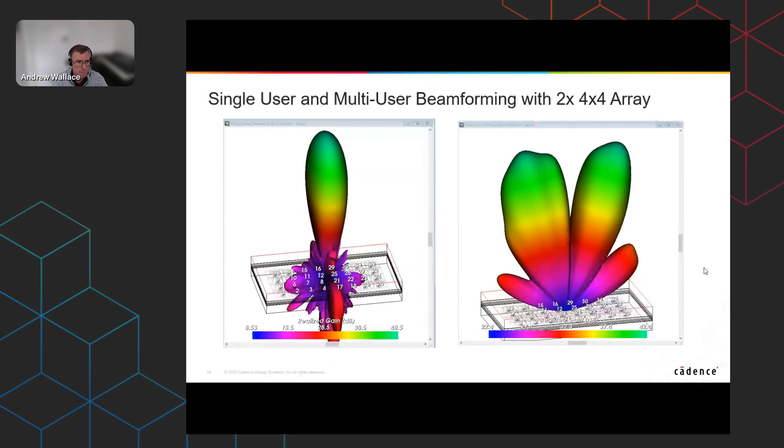If we come back to our simulation result - where has it gone? We're sitting just here in a moment. That will pop through and show me the simulation answers for our design tool. So finishing off on the slides, I've shown you the Microwave Office structure, AXIEM, the Analyst.

In fact we can right click and choose Clarity as the engine, all the electromagnetic tools as part of the design flow. We've worked through multiple technology approaches from MMIC chip, PCB multi-layer, we've looked at 2D and 3D horns, and you can see now the software has jumped back in onto full screen and hopefully shared.

The results are very close to finishing. That took about 6 or 7 minutes on my computer while I'm also running the webinar.

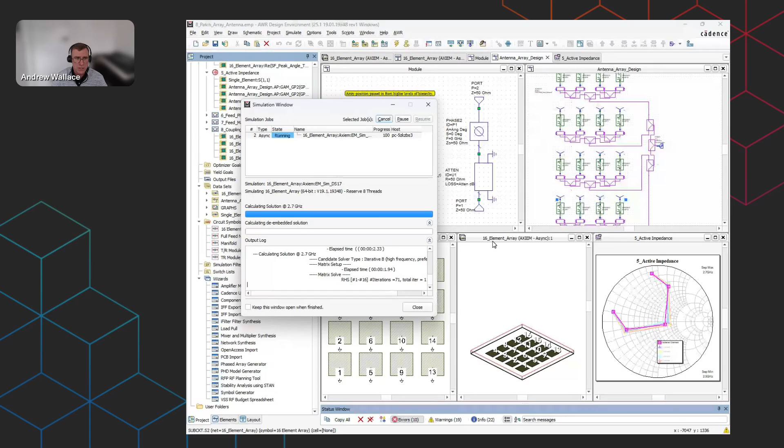Now, I do want to point out that training is available, and ultimately we can eliminate costly errors, accelerate time to market, and meet our modern design trends, regardless of it all still being in simulation. So yes, a very powerful approach and tool. I'll give that just another minute to finish, but I'd like to invite Alex back at this stage.

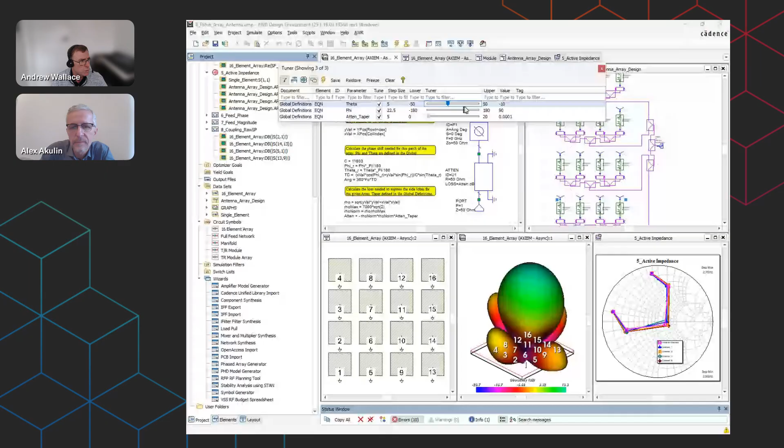On the question about Clarity being integrated - no, not at all, because literally all we do in the software is right click on the EM structure. This is the 16 element array. We can set the simulator and choose which engine this is sent to, and it's down to the user to decide whether a planar tool is appropriate, or whether a 3D tool is appropriate. Of course, Clarity, with the ability to run across a compute farm, does cost a bit more money, and it does take longer in terms of simulation time. So there are benefits to the planar tool.

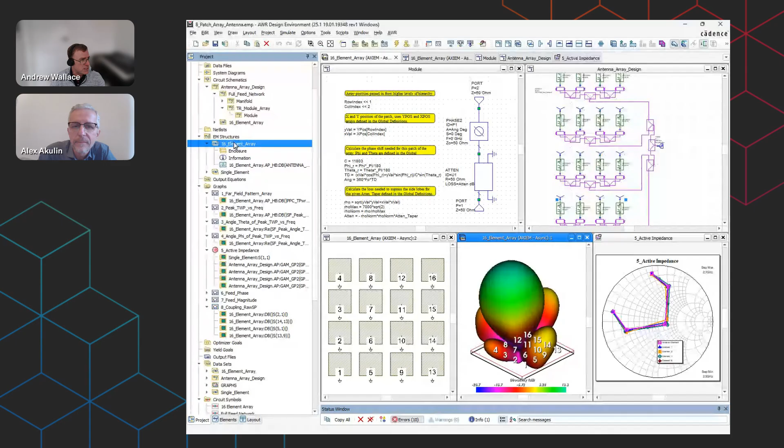If you wanted to replicate this design and have the answer in Clarity, you simply drag and drop the design - as simple as that, mouse click, drag and drop. You right click, set the simulator, and we set this to be Clarity.

The first thing you see is that it's now in a 3D enclosure, because the 3D tool needs a 3D structure. And when I come in and mesh, as you saw earlier on, it will mesh with tetrahedra rather than flat triangles. So there's a beautiful way of running in both tools. If you wish, you can compare one to the other and look at the answers.

One downside, of course, is Clarity is a separate standalone piece of software. So it does need to fire up the software in the background, mesh it, and then bring the answers back. And that's what you've seen happen here. Once again, live, I'm not cheating. It's meshed that full structure for us in 3D tetrahedra in a remote engine. So you get the beauty of both worlds: the speed, if the problem is planar, or the power and ultimate accuracy, but at a cost, if the structure is 3D.

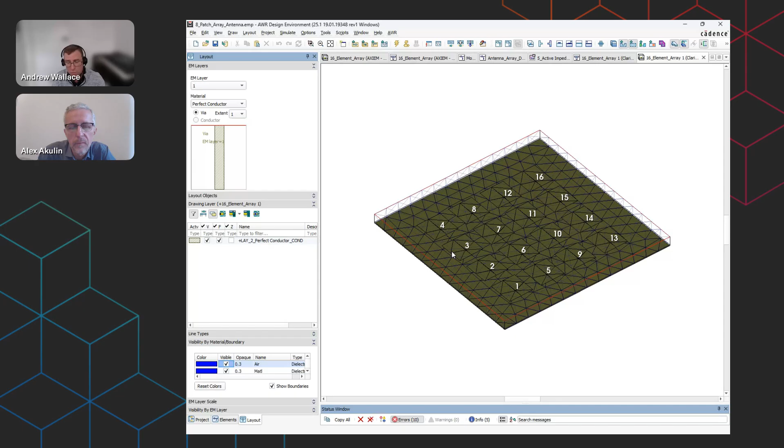Andy, I have heard that Cadence had embedded Clarity, this great 3D solver, into Virtuoso, the tool for analog and RFIC design, integrated circuit design. Yes, so there is a new technology which allows us to simulate 3D IC constructions as well. It's exactly the same platform, and we just talk to it from both original design cockpits.

Perfect. Then the next question is, where are the slides to go through for ourselves later? Will the slides be available? I believe that the marketing team will certainly change these into PDF format and share them with the audience. So anybody that's registered today will get copies of the slides.

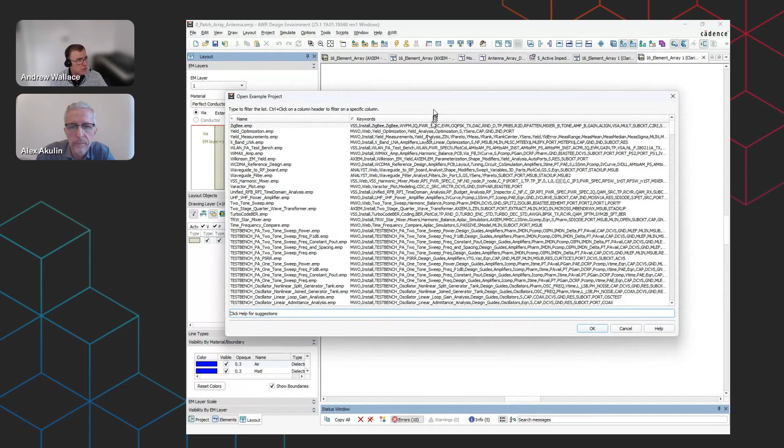Most of the projects that I've shown today, in fact all of them, you'll be able to find for yourselves under File, Open, Example. If you search for keywords, you'll find every one I've shown. For example, the patch antenna is sitting there, the patch array that I finished with is sitting here, and the low noise amplifier, if I type LNA, the first initial design is also built into the tool. So you'll have them in the software if you have a trial license or the software already installed on site.

So if we generate the trial license for the customer, or we provide the license for the student, they could find all these projects available in the library, right? They certainly can, yes. Yes, indeed.

Great, great. Then the next question is, minimum requirements for hardware to run the tools mentioned in the webinar. Really good question, thank you, Pavel.

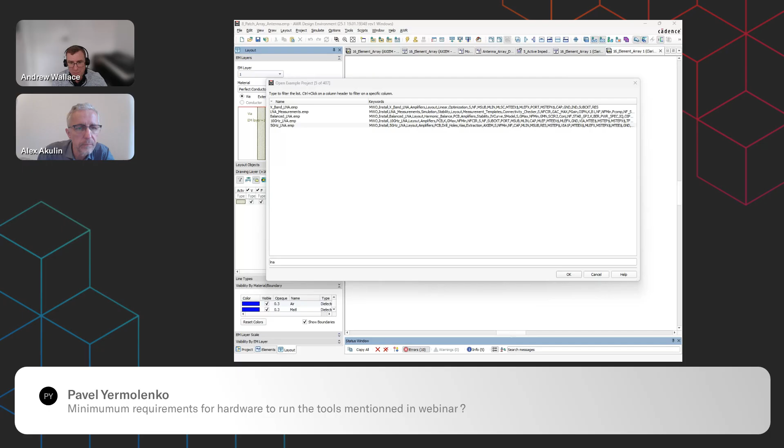Fantastic question. To be honest, I've run this on an old Pentium 3 machine with 8 gigabytes of memory. It is a bit slower, but that machine is about 15 years old. The software itself operates according to the processor power you have available. You can go into the settings and add more cores if you have the licenses to do so, and it will run faster and more efficiently on any standard machine, be it a laptop or a desktop.

And of course, if you have compute farm capability, we can break out that problem and run across multiple cores. I've seen customers run designs that sometimes take 3 hours on an 8-core machine, running in 5 minutes on a multi-core farm that might have access to perhaps 96 cores. So that speed and time delay is dependent upon the processor power you have available. To be honest, I would say use the machine that you buy for your children for gaming. Those machines today have fantastic memory and core capability for processing 3D gaming software.

Okay, thank you. Next question: are these tools available for a student's license, or do you need a commercial license?

No, we don't restrict the student license at all, Alex. You have everything available to you. Through the Cadence Academic Network, we do ask that the university signs up to teaching with the tools, and then that university domain can be made available for students to download a local license to their own machines. They're not limited, though you do have to request Clarity separately because it's a separate Cadence tool, but all of the AWR platform features are available in the student license. They typically run for 6 months at a time, and require you to be a current student at a registered university with a university domain email address. That's how we monitor and maintain that. So when you become a commercial engineer, you cannot take your student license with you, I'm afraid.

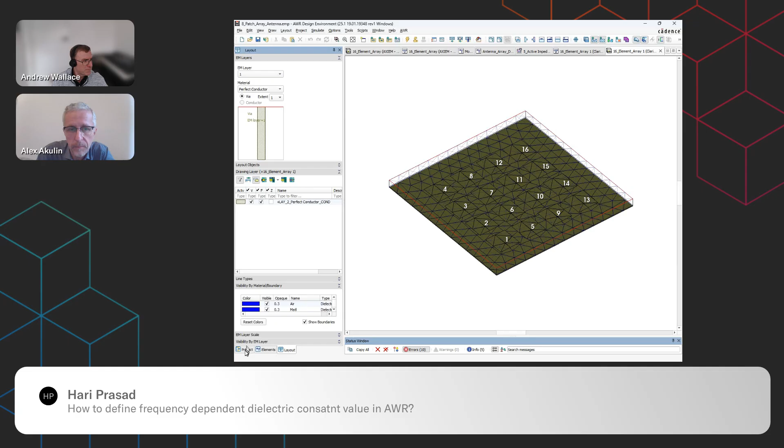The next question is how to define frequency-dependent dielectric constant value in AWR. When defining the enclosure and the dielectric properties of the materials, we set the grid size and the materials. If we wanted to, we could make this property a variable, and hijack the frequency of the simulation to adjust that variable. So if it changes with twice the frequency, we put that in a simple equation, and that value is applied for the permittivity as we do the frequency sweep.

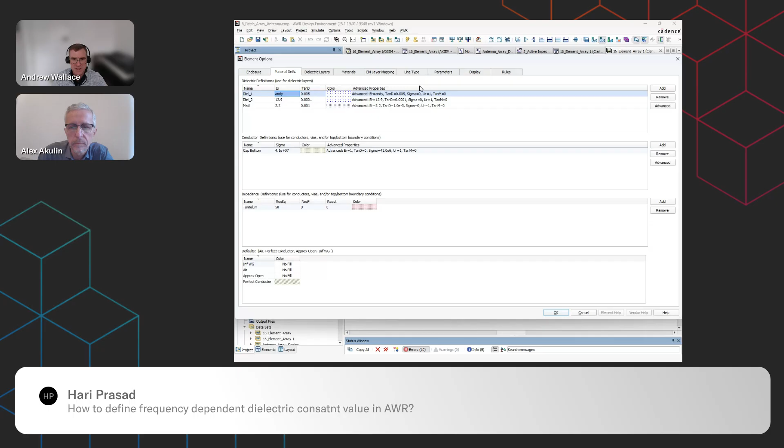It relies on the user to know the relationship between frequency and the variation in permittivity. In many cases, for board material in the schematic diagram, under the Elements web-based libraries we have a lot of substrate vendor materials. Material vendors, for example Rogers, give you the ability to simulate with a particular board material they make available, such as 5880 in various thicknesses with tolerances. The beauty of using that as the substrate definition is that when we drag and drop it into a simulation, the parameters are already set for yield information and tolerance according to the manufacturer's published data. If you're using a material already available in our libraries, it comes with yield variation tolerances. They don't give you the variation with permittivity and frequency, I'm afraid.

So you mean Rogers doesn't give the information of variations of permittivity? Not in their library elements, no, that's down to the user to add, because I think all board manufacturers assume a constant value. Rogers for sure, and such producers of high frequency PCB materials, they provide the full information of frequency dependency.

And another question, I see that you provide a huge library of materials, but I heard there is also a huge library of components available from Modelithics, which is very well connected to AWR, right? Yes indeed, Modelithics is a library where a company in the US has measured surface mount devices on specific board material, and those component models vary depending upon the material you put the device on. For example, if you've got an 0805 capacitor on Rogers, it will have a different simulation model than if it's on FR4 or alumina. They've coded their devices with quite advanced models.

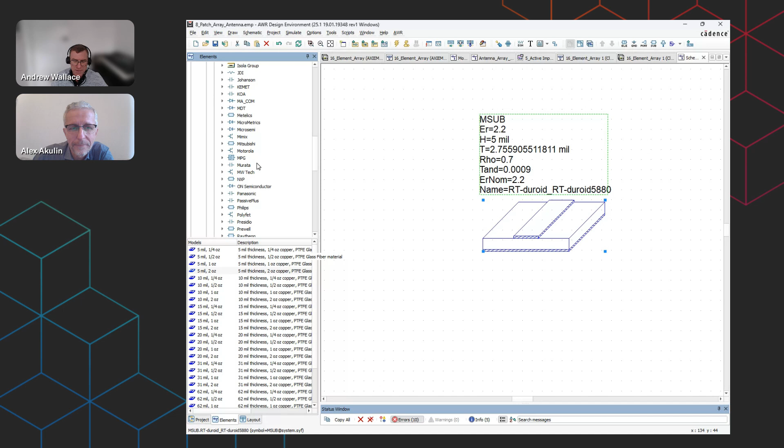We do need to come into the software and do File New with Library. That, if we start with the Modelithics library, gives us the ability to have the Modelithics elements inside the circuit element library list. Unfortunately, that is a costed library of parts, because Modelithics do a huge amount of work to measure these devices on that board, and they sell those as more advanced models. So if you want the ultimate in accuracy on your very specific board material with your specific thickness and plating thickness of track, then yes, Modelithics is the way to go.

Sorry to interrupt, I believe some models are free of charge because there are advertisement agreements with suppliers of these components. And yes, there is also a service, so you can ask Modelithics to create models for the components which are important to you. So it's not just a fixed library, it could be enhanced with new components. It's a paid service. Okay, thank you, that's great information.